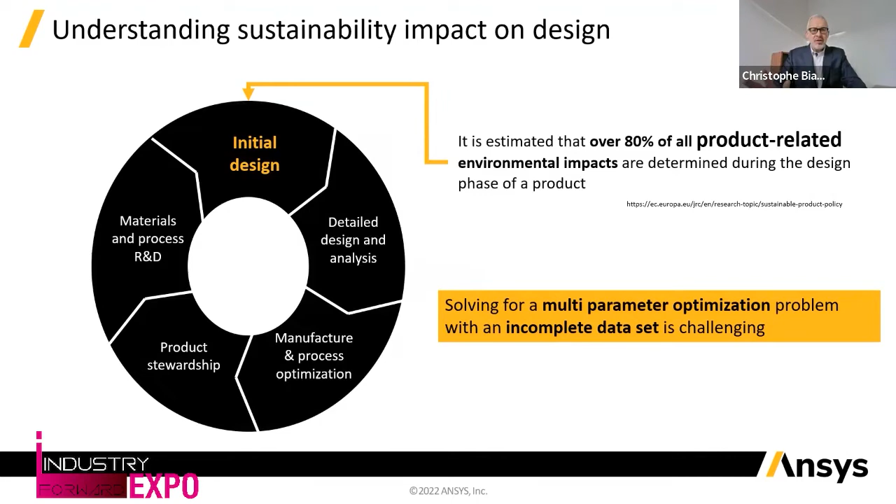What do I mean by simulation? What is it really? Well, we can say that simulation is a process of modeling the effects of the laws of nature onto your future product without having to create a physical prototype. In other words, simulation reduces the need for prototypes.

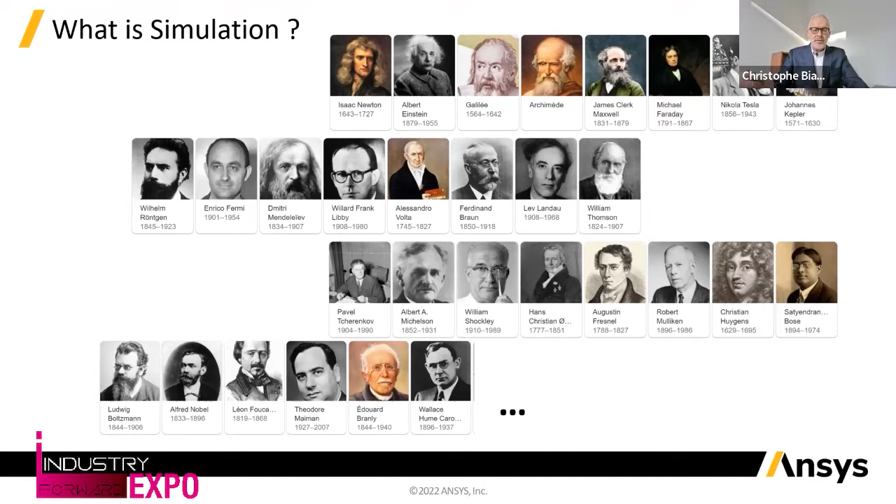In the late 1800s, beginning of the 20th century, famous mathematicians and physicists created mathematical models for most of the laws of nature. From Isaac Newton, who discovered the laws of gravitation, to Edouard Branly, who modeled radioconduction and telemechanics. From Satyendra Nath Bose, who worked with Louis de Broglie, Marie Curie, and Albert Einstein, to Ludwig Boltzmann, who created models for the kinetic theory of gases. All these scientists had one thing in common: understanding the laws of nature and modeling it with mathematical tools.

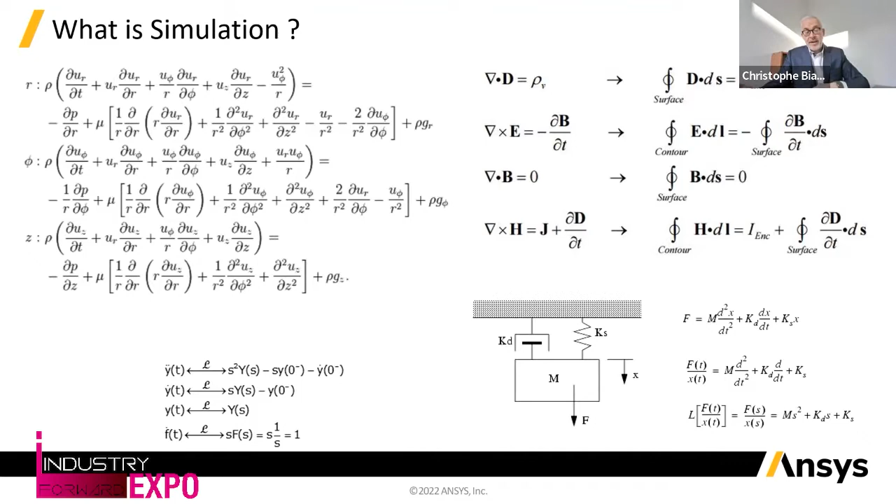What we've been doing at Ansys for the past 50 years is simply to model these equations into computer software, including their boundary conditions, to provide solutions and results after refining and optimizing the calculation, so that you can predict extremely accurately the behavior of any object or product under any set of conditions, even if you don't know all of these conditions. So in other words, simulation is a process of modeling the laws of nature for your future product without having to create a prototype. Once again, simulation reduces the need for physical prototyping.

Now, over the past 50 years, engineers like all of us on the phone have developed solutions and design methods relying on simulation to perfect the art of creating faster, cheaper, and better products. Our customers, the engineering community at large, has become extremely effective and mastered these methods in order to find the

best solutions and trade-offs in this tridimensional space. But sustainability and the impact on resources and the environment were seldom a high priority. And when we add sustainability dimension and the growing concern and care about the protection of the ecosystem we live in, this completely breaks the pattern. There are way more parameters to take into consideration, and the engineering methods, processes that we built and perfected over time now limit our potential.

We have to reset and restart by considering this fourth dimension with the same or even higher level of priority over cost, performance, and quality. And this creates a much more complex problem to solve. And of course, as engineers, we love complex problems to solve. And we're lucky to have simulation boosted by artificial intelligence and machine learning to reinvent our innovation methods in order to recreate better, earth-friendly products.

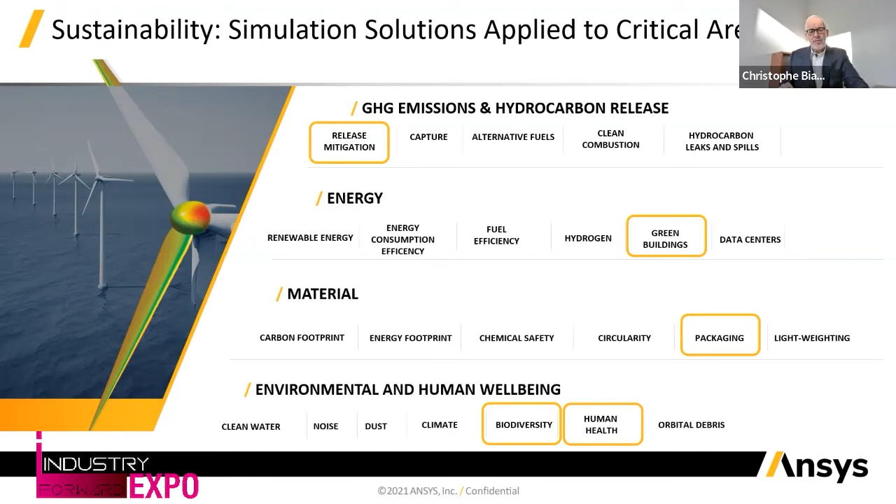Now, out of these four main categories, simulation has been and continue to be applied to multiple domains and industries, such as oil and gas, automotive, high-tech, industrial, construction, consumer, agronomy, and healthcare. And in the next few slides, I'll focus on a random selection of applications and dive deeper into the usage of simulation and its benefits.

In industrial plants, flare stacks are primarily used for burning of flammable gas released by safety valves during unplanned or planned overpressuring of plant equipment. And during planned and partial plant startup and shutdowns, they're also often used for the planned combustion of gases over a relatively short period of time.

Not only simulation can predict with high accuracy 3D models the flaring and dispersion of equipment, but with the ability to change and simulate the fuel composition, it gives a fast emission prediction based on reactor network modeling. And with real-time models, coupled with sensors and connected industrial systems, it can be built into digital twins, allowing for predictive maintenance and dynamic control of the flare system, resulting in safer operation and minimizing emission of harmful pollutants.

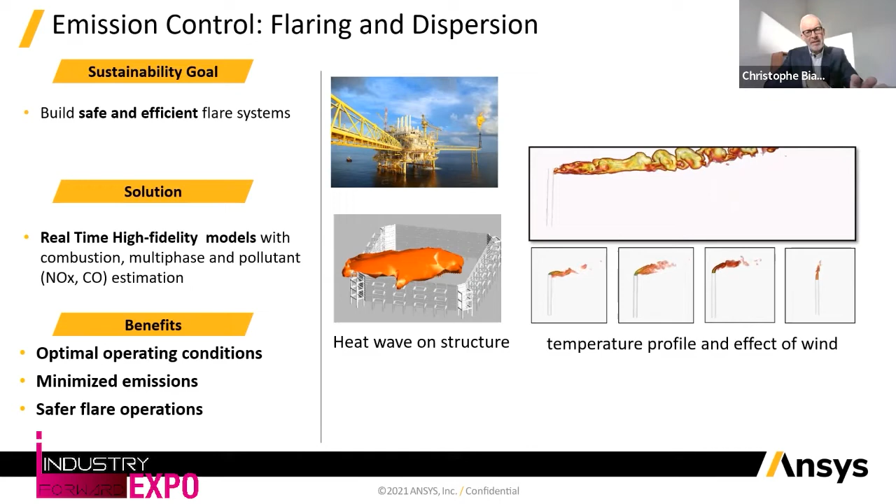This is a completely different project. Here we demonstrate the use of engineering simulation for smart urbanization. Computational fluid dynamics simulation was used to improve the renovation of Brussels state administrative federal government buildings. It's a site of more than 14,000 square meters of office space that is to be turned into housing, apartment building, offices, shops, parks, and schools.

Here, what we simulate is the effect of wind. And the wind analysis is useful in studying many parameters related to a site's user comfort, in this case, including high-rise buildings and green spaces. In some instances, the building will act as a shield, a screen, and improve the comfort, but in others, the wind pattern could cause significant discomfort and might even be dangerous to both the pedestrians and the occupants.

Several different phenomena can occur, such as channeling and wedge effects that lead to local wind acceleration and increased turbulence. These phenomena can contribute to the discomfort for the people located at the ground level, terraces, and balconies. And the wind effect can also damage vegetation, but also generate an unwanted pressure effect on the building that create whistling effect or material damage.

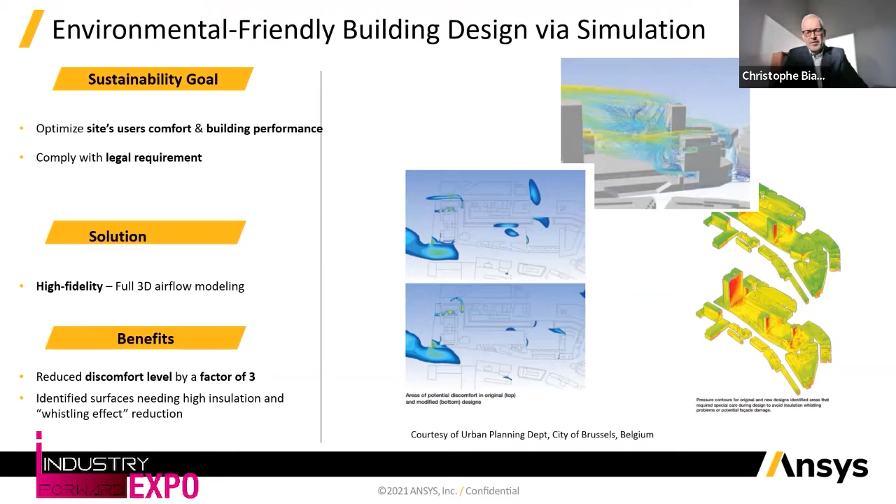There is a standard in construction in Europe, and this is measuring the discomfort metric, and that corresponds to a wind speed at about 1.70 meter above ground, the average human height, that should not exceed 5 meters per second more than 220 hours per year. And here, simulation provides a quantifiable assessment of a project performance, of course, prior to building any prototype.

Another cool example of the use of simulation for sustainability is the design of recycling plants. First in Europe, and now in the US, recycle centers are coming to depend on short wavelength infrared sensors, SWIRs, spectroscopy that helps sort out plastic in the waste stream.

The complete equipment is usually between 512 or 1024 low-cost SWIR elements in a line scan. These cameras, with wavelength sensitivities ranging from 1100 to 2200 nanometers, are mounted onto a spectrograph. While monitoring the conveyor belt, the spectrography rapidly identifies the polymer type and triggers the diversion of the waste, usually by air pulses, into its proper bin.

Simulating very accurately the light propagation and associating this with material property and electromagnetic analysis is key to the design and tuning of such products. The key metric is a reduction of the rate of false identification of plastic type while maintaining fast throughput. In that particular case, simulation helps optimize the design of the absorption layer for efficient processing, and optimize the head design of the SWIR system for better coupling of the reflected light.

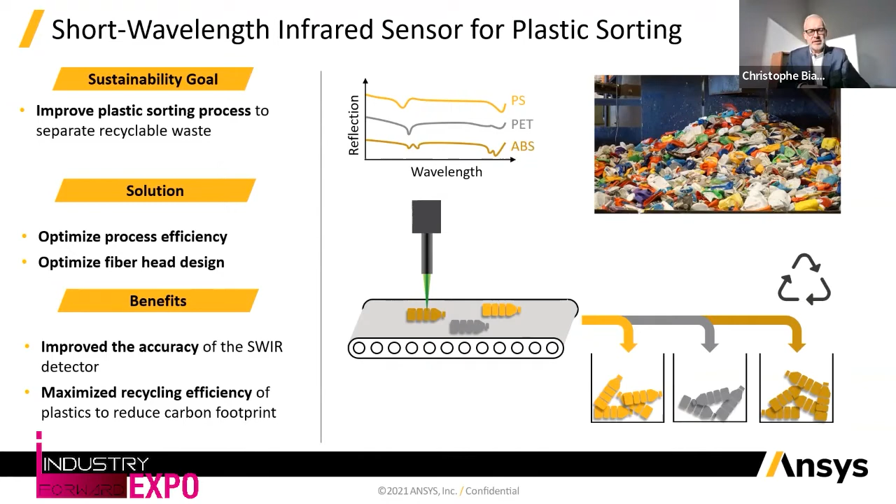Now let's take a look at how simulation can protect biodiversity. And I know it's a stretch, but actually this is a true example.

There are more than 60 dams on the Columbia River Basin in the Pacific Northwest region of North America. They created water conditions that are harmful to marine species such as salmon and steelhead trout. The efficacy of any fish passage structure, device, facility, operation, or measure is highly dependent on local hydrology, the target species, where they are in the life cycle, the orientation of the dam, the turbine operation, and a myriad of other site-specific considerations.

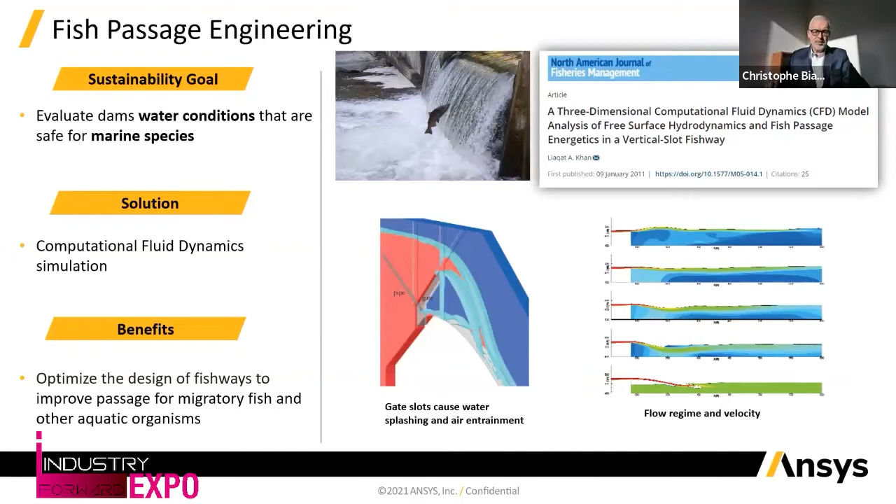And finally, an example which is still dear to us: face masks. Each month, there's about 130 billion face masks used and disposed of globally. If you just take the lightest of these, the surgical mask, it weighs about 3.5 grams. That's about 450,000 tons of masks a month, 5 million tons of masks to be recycled every year. That's more than 65,000 fully loaded Airbus A320s in weight, in comparison.

In that particular case, material intelligence is an essential element for design for sustainability, and that applies to all products. In the early phase of designing a new product, the choices of materials rely on accurate material properties, the assessment of the sustainability of the materials in its use and also when it is discarded, allowing you to assign and trace material information throughout the product development and life cycle.

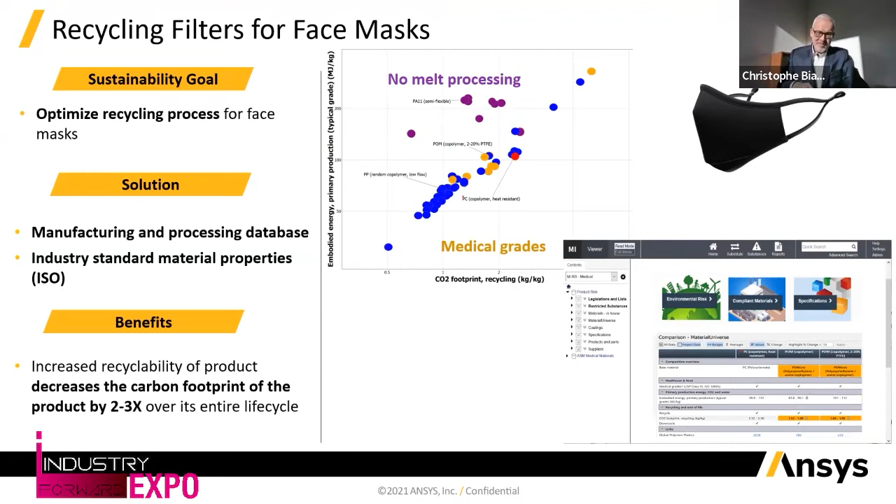And these were just 5 examples. If you're interested, we have 45,000 customers worldwide, so we have thousands of additional examples. But as a conclusion, what I'd like you to leave with is the fact that engineering simulation is not only a design tool that helps reduce time to market, improves quality and cost, but it's also an essential tool that will help us address environmental challenges and design more frugal, recyclable, and sustainable products.

And maybe a quick call to action to all the engineers on the call: use simulation to invent more. Simulation coupled with machine learning is a tool that allows you to explore more space and innovate for resilience. Do less prototyping for less waste. And train both today's engineers and tomorrow's engineers, not only on improving product, cost, performance, and quality, but also target sustainability and the protection of Earth as one of the key guiding principles of our engineering practice. And now, if you like, I'd like you to challenge me with your comments and questions in this interactive session.